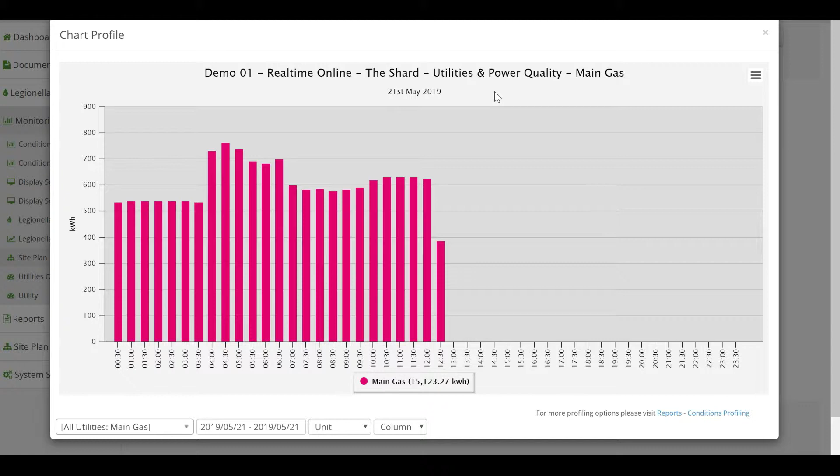So if I take a look at the sensors in a bit more detail, and if I start with the one at the top, I can see the main gas consumption for the building. I can report on various areas here, but for this site we're showing the current meter reading and the daily usage. And if I click through here, it'll show me how much gas is being used at each point during the day. If I have various devices in a building that use the gas, then I can have a sensor on each gas feed so I can see how much each individual device is using.

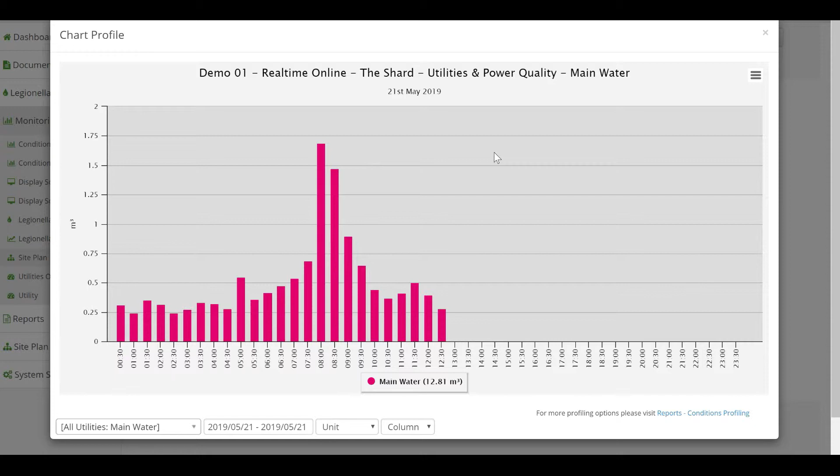I have the same readings for this below for the water meter, and again, by clicking through, I can see the peak times of day that water is being used. Again, I could have sensors placed all over the building and monitor individual water supplies to see where the water is being consumed. I then have the same level of information available for the electricity supply.

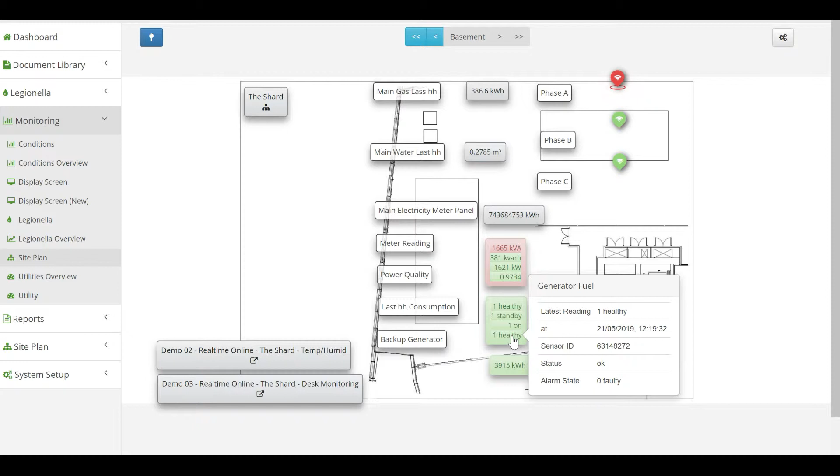Now this is quite common in a lot of key buildings. You'll see on this site it has a backup generator. Clearly this is used in case of emergencies, and although it's not in use, I need to know that should it be called upon, it's ready to go. And looking at the generator, I can see the unit is powered on. I can see that there are no alarms or warnings, and I can see that the fuel level is okay. So this should be ready to go should we have a failure at any point.

I then have a few sensors here that are away from the main meters that are monitoring the utilization in real time. Using these sensors, I can choose what areas I want to see and see how the building power supply is performing. Now, I'm not an electrical or maintenance expert, so I won't pretend to know what each of these readings means, but I'll show you the type of information that can be seen. As you can see on all the sensors and the elements in the dashboard, you can set a maximum and a minimum threshold. If you do this, you then get the system to trigger an alarm and report on any thresholds that have been broken.

So if I click through and take a look at this one, I can see the levels that have been set, the minimum and maximums, and I can see on a couple of occasions the consumption on this sensor has breached one of the warnings. This is why we had an alarm earlier. And if I click through on any of the sensors, I can see the same level of information.

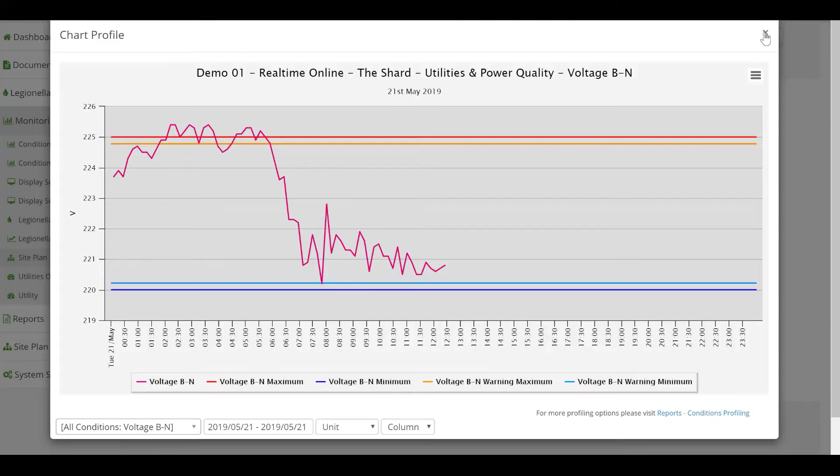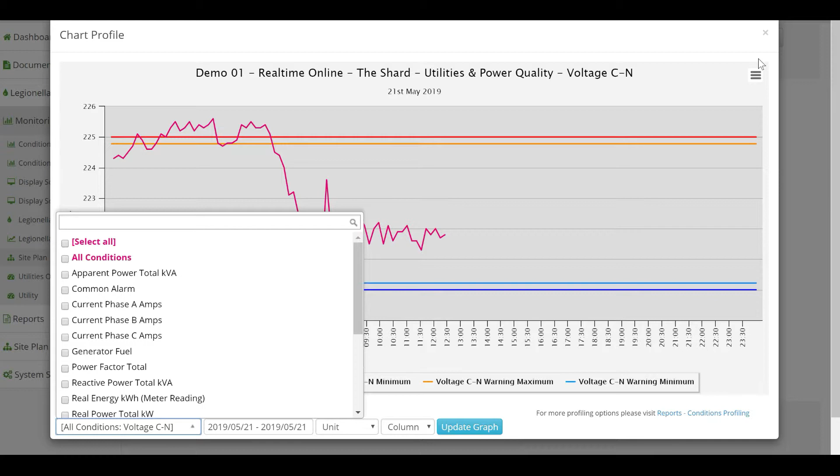Once I've got the graph format up, if I use any of the tabs at the bottom, I can change the level of information that I see and the date range and the units, etc. As you can see, many different areas you can measure. Clearly what you're seeing is in graphical format, but also if I go to the top right hand corner of the graph, I can download this information in various other elements and print it out.

So let's come out of the basement now and look at another area of the building that's being monitored. We'll take a look at the first floor offices. So I can see initially, first floor offices, I've got a number of sensors that are in there, but also I've got a number of sensors that are in an alarm state. And if you recall what I said earlier about the alarms, I advised you could set a minimum and a maximum threshold. This tells me that one of the thresholds around these alarms has been breached. And whoever was responsible for these alerts will have been notified.

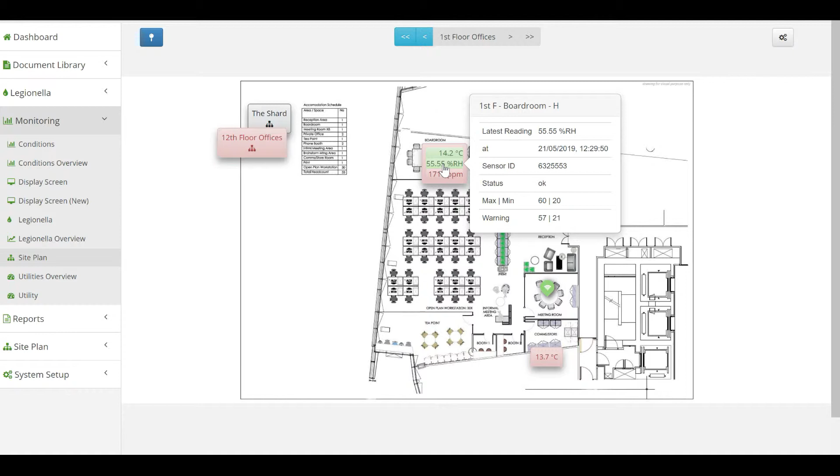And one of the alerts is coming from the boardroom. If I hover over this, I can see the alert is coming from the air quality monitoring, measured by ppm. Other elements that we're monitoring in the boardroom are humidity and also temperature. So if we click through onto this, we can see the thresholds that were set, and we can see that the air quality is down to the CO2, and it's been well above the agreed threshold for a period of time now, but clearly hasn't been addressed.

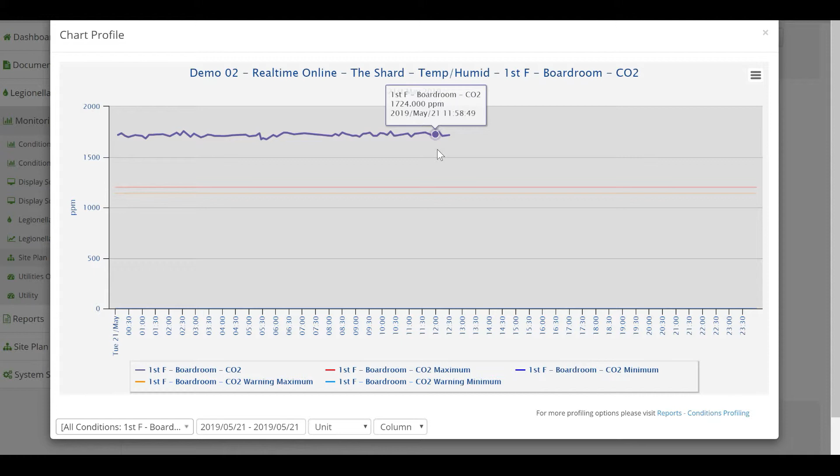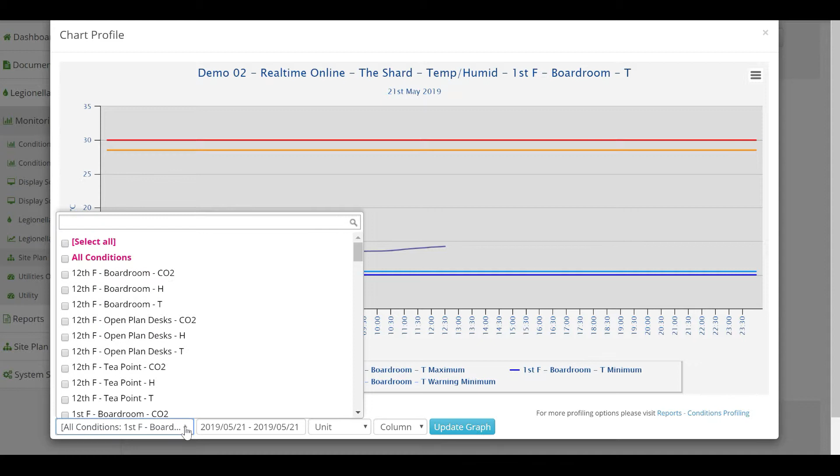If I come out of there and have a look at the temperature monitoring, I can see nowhere near either the top or bottom threshold, so this sensor is performing perfectly and the room's at the right temperature. Again, the tabs at the bottom allow me to report on other elements, and also if I've got sensors in other rooms, I can click through those and see how they're performing. I can also see there's alerts in one of the meeting rooms here, and I've also got sensors in a meeting room here, but all these seem to be performing perfectly.

So let's pop out of the first floor offices now and take a look at elsewhere in the building. Let's go into the restaurant. I can see I've got a number of sensors in the restaurant. Again, I've got a few with alarms. As I come into this area, I've got a few different types of sensors now measuring information for me in the restaurant. For a start, I have sensors placed in all the freezers to make sure they're operating at the maximum efficiency and to warn me of any malfunction.

In this environment, particularly in a restaurant, I've not just got the cost of any spoilt produce if a freezer goes down, but there's also the health and safety risk involved. Using our fridge and freezer sensors, you've got access to a full suite of HACCP reporting, as well as the normal fridge reports that a business needs to supply and meet the health and safety standards. The great thing here is all our reports are automated, so it takes the strain away from the resource required to manage and monitor. Whilst looking at the freezer sensors, I can see there's maximum and minimum thresholds been set, and again, if I click through, I can see how the freezer is performing. So I can see nowhere near our thresholds.

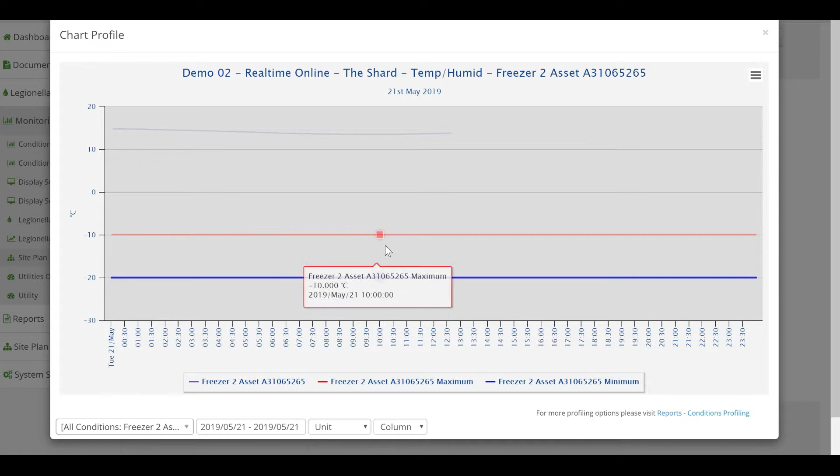Other useful sensors we have in the restaurant area are occupancy sensors on the chairs. This gives a view of what chairs are occupied and what chairs aren't. So we can start to get useful data from this that shows trends regarding when the restaurant is full, how long people stay in the restaurant, when a chair is being utilised and when it isn't exactly. And I am skipping through some of this quite quickly because I do have quite a bit to show you. So I'll come out of the restaurant now and we'll take a look at the 12th floor.

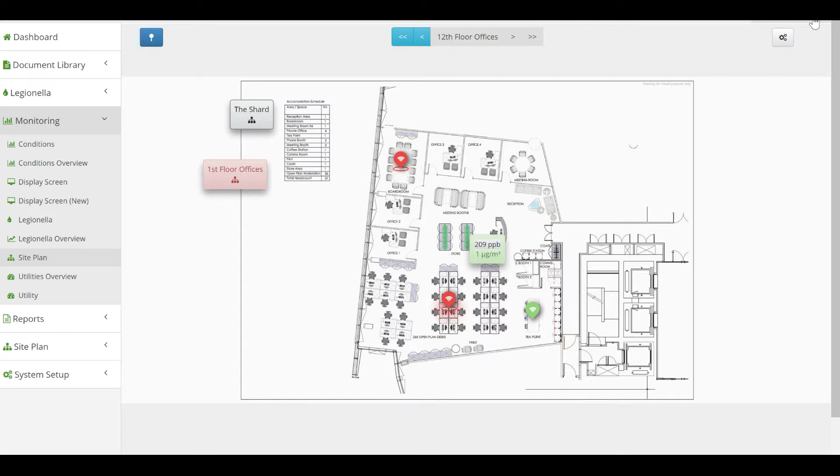I've got similar sorts of measurements on the 12th floor. So again, I can see I've got two sensors that are in alarm, both of them for air quality again. But the types of things we're measuring are the same as before: temperature, air quality, and humidity. And I've also got a sensor at the tea point to make sure people are comfortable there. What we do have around the building in some of the hot desk areas are also some of the movement sensors on the chairs.

As well as being useful in a restaurant, they're ideal to manage how long people are sitting at a hot desk for, and also for individuals to look for a vacant hot desk rather than having to walk around the building. So quite a bit of information you can get just from placing sensors on what would normally be non-connected objects.

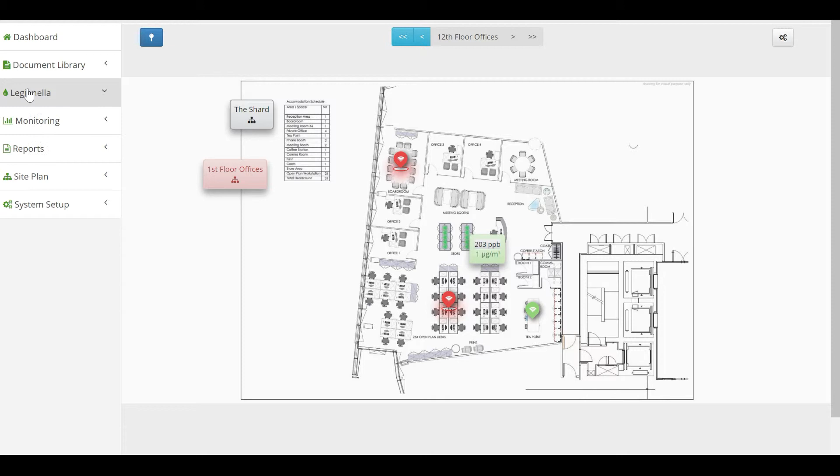So other areas that we monitor using smart building sensors are things like Legionella. So I'll give you a view of different dashboards to show you these in a different format. So if I look at our Legionella dashboard, I can see numerous elements here. So I've got notifications. This tells me if we've had alarms and if the alarms have actually been dealt with. I can see monthly reporting.

Again, from a Legionella point of view, what you need to be able to do is identify that you're measuring and monitoring the hot and cold temperatures on a regular basis throughout the month. You can upload schematics, so you can see exactly where all the sensors are. And clearly there's a dashboard that will enable you to see exactly what's monitoring.

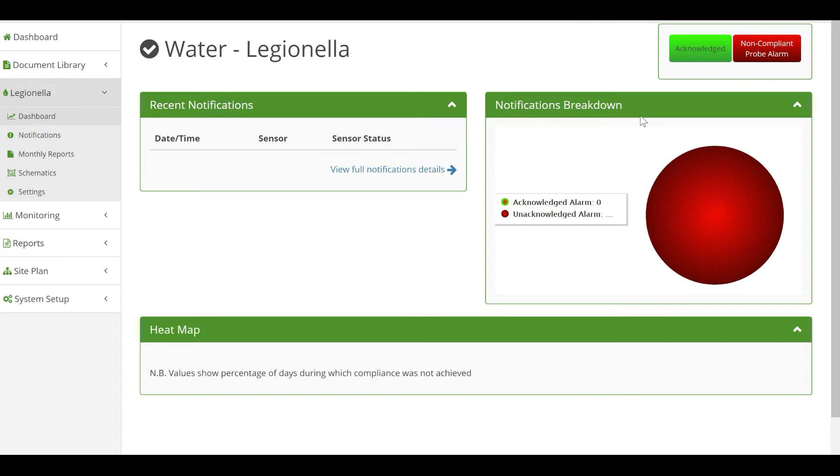And if I show you what a basic dashboard would look like with the sensors, I can see the sensors we've got planned out here at the moment. Most are performing perfectly. However, the female toilet tap has had a few issues. The hot tap on the kitchen sink has had a number of issues. All these can then be investigated and measured and monitored to make sure that a building stays completely compliant from a Legionella point of view.

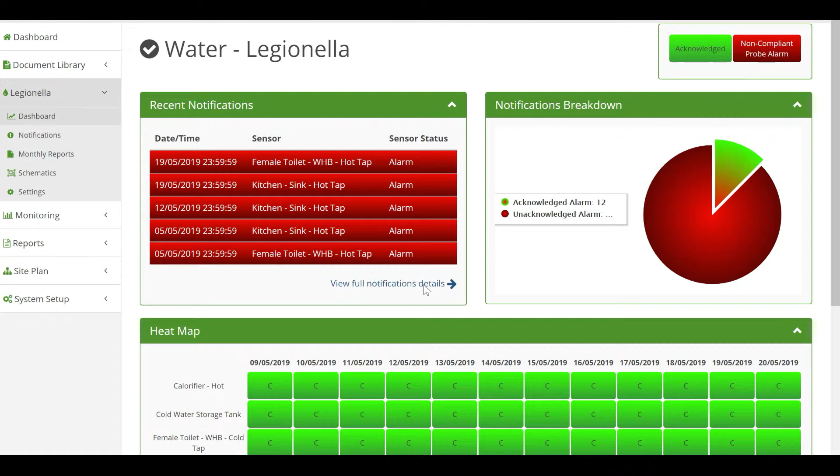Once I have a notification, I can click on it and I can see exactly what the issue is. If any actions have been completed, there's an audit trail. An engineer would go in, make a note of the actions he completed, and you would then get a list of them here, and this would change to a green completed. If I just wanted a quick snapshot overview, I can see of the total of sensors, 8 passed, 1 failed, and I've had 5 notifications.

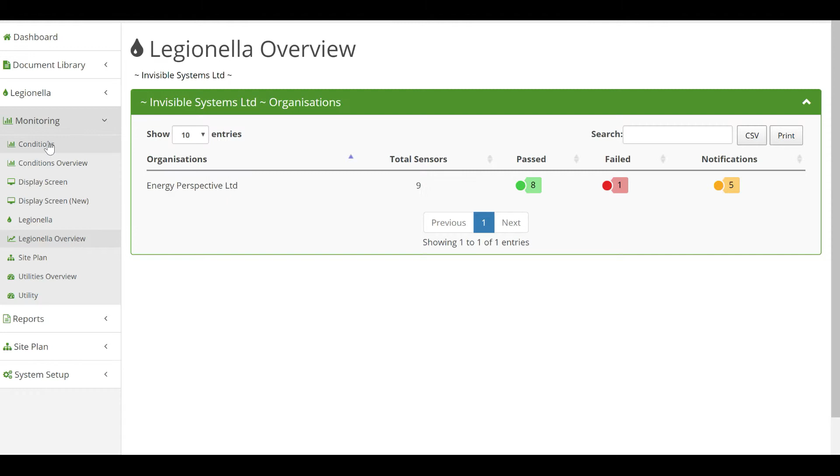Click on conditions, and these are the different types of dashboards you can see. So if it's easier to monitor with a traffic light system, I can see the same level of information again. So incoming cold main, I can see the temperature. Cold water tank, I can see the temperature. Kitchen sink, I can see the temperature. And again, if any of these were in alarm at this particular moment in time, it would be flashing red to let me know. So a really easy way of managing and monitoring hot and cold temperatures of the water within a building.

Now, Legionella compliance is really important, particularly in the food industries or in healthcare. So this could be an element that's sold as a standalone piece of kit. Now, at this present moment in time, I'm not going to go into the reporting because that could be a full webinar in itself. But you can get a full picture from the reports from the system of what your building is doing and how you can stay compliant in all areas.

This building we're looking at today also has a weather station. So if we go to here, we can see what's happening externally as well as what's happening internally. And the types of things that we're monitoring on here, again, are air quality, external temperature, wind velocity, air pressure, the solar power that's coming into the building. Again, various different dashboards and conditions that we can look at depending on the end user and how they want to see things presented.

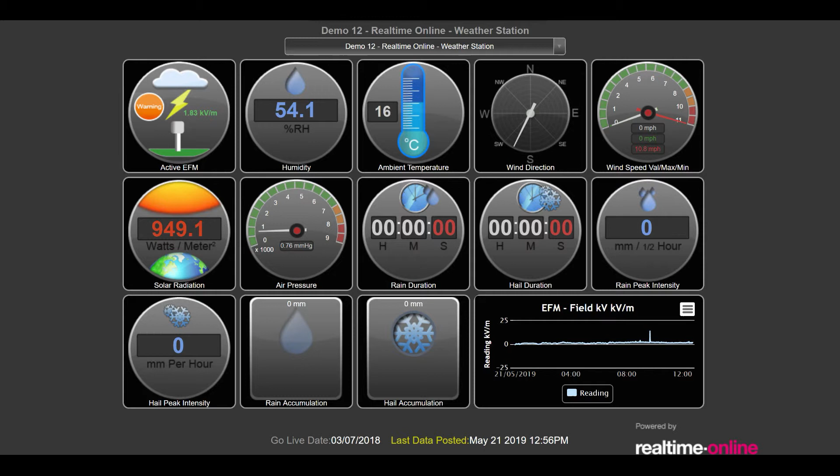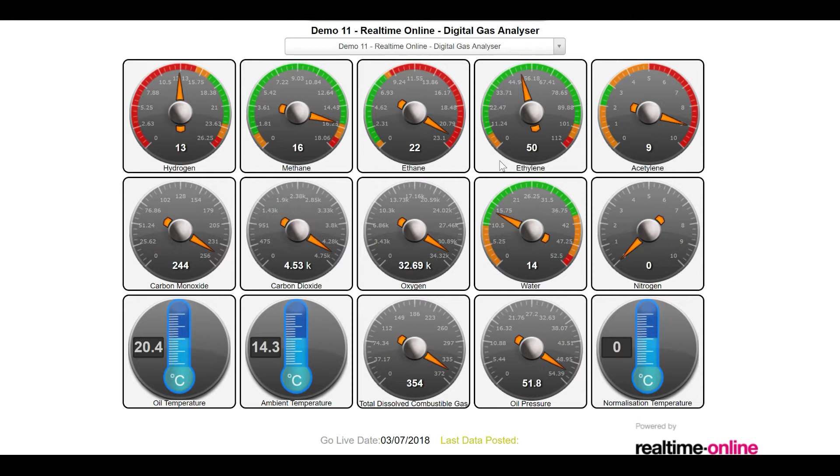So I won't go into any of these in any more detail because air quality is not something that everyone would want to look at. But one of the things that we do find really useful is things like digital gas analyzers. When you've identified that there's different gases around, it's useful to be able to break this down and monitor specific gases for specific areas. So again, some of the sensors that we've got out here in this building will give us this level of information. And there's nothing stopping you putting multiple sensors into the same office.

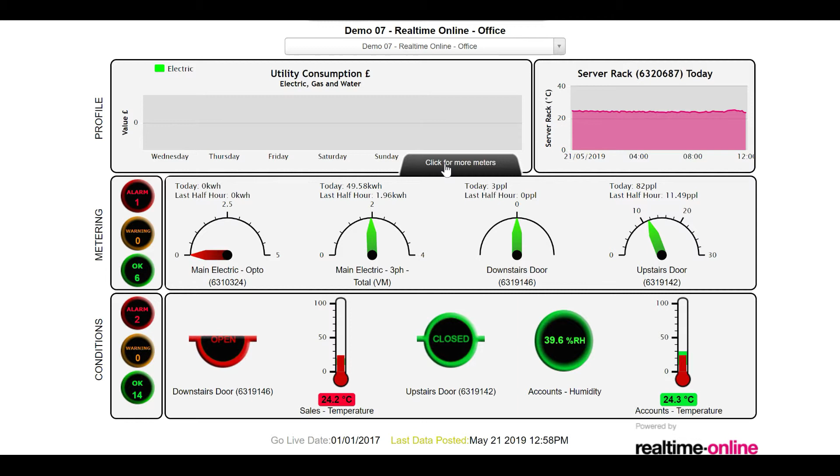So if I look at this office here, I can see I'm measuring multiple things. And if I look in more detail, I'm looking at electricity being used. I can see that I'm monitoring the doors to see whether they're open, whether they're closed. And I've also got different dashboard views that I can look at to present the information to me differently.

So I can see the downstairs door is in alarm, it's open. I can see the temperature in the sales room is higher than I want it to be. Other areas, the doors are closed, temperatures are okay, the humidity is okay, the electricity is being used correctly, etc. I could go on and on from here, but for now I think you get the picture. And you can see the type of things we can offer from a building management point of view.

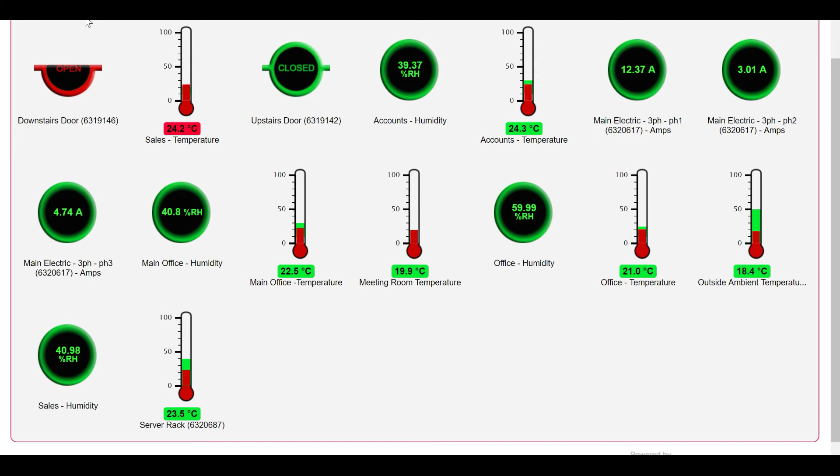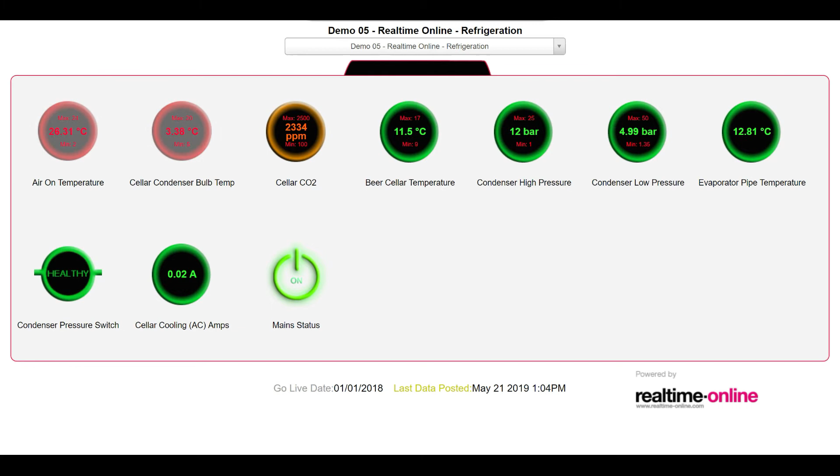So just to finish off the demo, let's take a quick look at some of the different dashboard options and some of the functions that you can see. As I said earlier, this is a typical office with numerous different types of sensors available for the office. If I look at refrigeration, I can get the same sort of dashboard. So I can see I've got 2 warnings and 1 close to a warning. Everything else is operating within the minimum and maximum thresholds that I've set. And all of the different dashboards are really easy and simple to select and use. Now let's take a look at the reports.

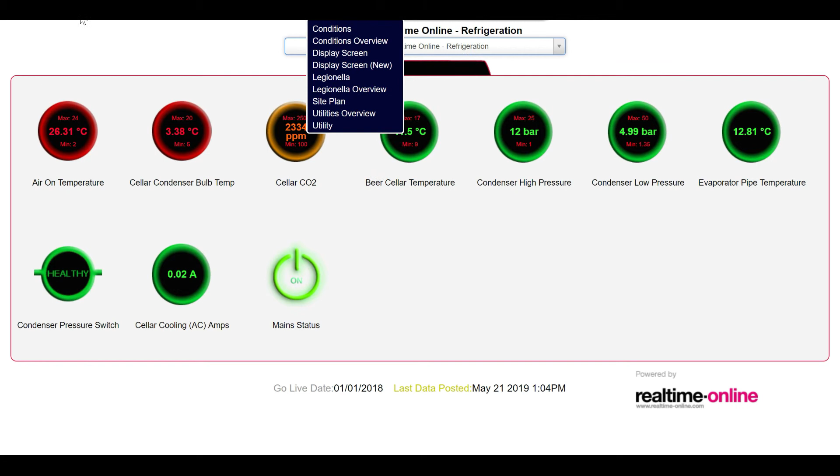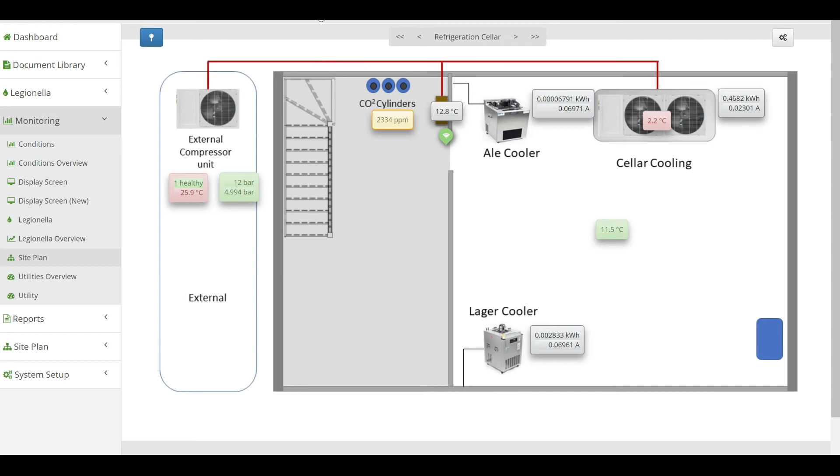So what I will do now is leave the demo platform there, because there's so many things we can do with it in relation to building management. The possibilities could go on and on. The great thing about the system though is that you could start with something really simple and just add to your system as your business grows, changes and develops.

So now we're out of the demo, let's have a look at how this will work commercially. It's a very simple model. Each one of the sensors is individually priced. These can vary in price depending on what the sensor does, what it's detecting and the capabilities, etc. The gateway or router is also a one-off purchase. There's usually an activation fee per device that's added each time a device is connected to the network. This is to cover the build of the solution.

Then, as per your SIM card services today, there's a monthly or annual subscription for the data consumption and licensing of the software. This is usually volume based, so the more devices that you have connected in a system, the lower the subscription per device. And as with all of our solutions, we can wrap up the upfront costs and the monthly subs and any activation fees into one easy monthly lease purchase option if required.